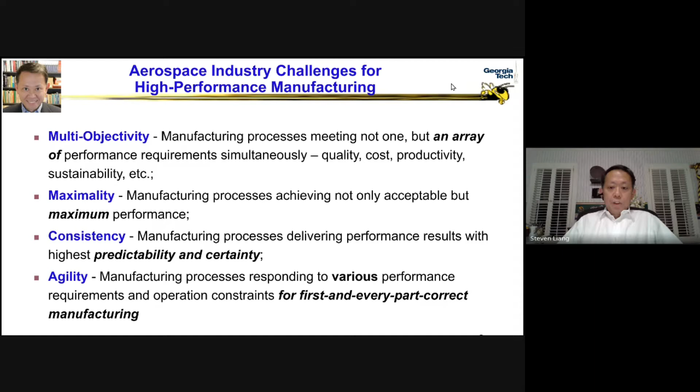We have been involved in quite a bit of effort on process issues related to modeling, improvement, and optimization, as well as the development of new processes. We're also interested in sustainability issues, quality issues, and their relationship to manufacturing and materials.

Let me get into the details of several examples in the field of subtractive manufacturing, the work we have done at Georgia Tech. The most typical example is the use of computer numerical control machine tools for manufacturing, but that technology has been around for several decades. With the use of sensors, controls, and actuators, we'll be able to close the loop.

Let me pop up my pointers. So we close the loop with the use of encoders and tachometers to put the part program requirements in terms of feed, speed, and position under very tight closed loop control.

However, if you tell your customer that your manufacturing feeds, speeds, and depth of cut are very well controlled, nobody will buy that argument, because your customer is mostly not interested in the part program. Instead, they are more interested in the quality, and in the manufacturing cycle time.

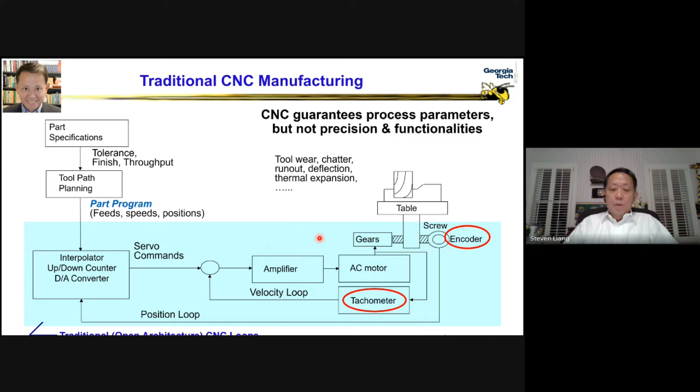So the computer numerical control loop has been found quite inadequate to satisfy the precision and functionality requirements at this current point of technology. So we are moving into smart manufacturing.

Smart manufacturing uses a whole bunch of higher level sensors to measure temperature, vibration, acoustic emission, and machining forces. That monitoring signal is sent to a smart analytics processing module, so that the requirements of the part's function and performance — dimensional accuracy tolerance, surface quality in terms of finish, and productivity in terms of throughput — can be put into a control loop to modify the machine feed, speed, and depth of cut, generating a bigger, more encompassing smart machine tool intelligent platform that surrounds the traditional CNC system.

In this way, the tolerance, finish, and throughput can be very tightly controlled afterwards. This is exactly what the customer would like to have, would like to see.

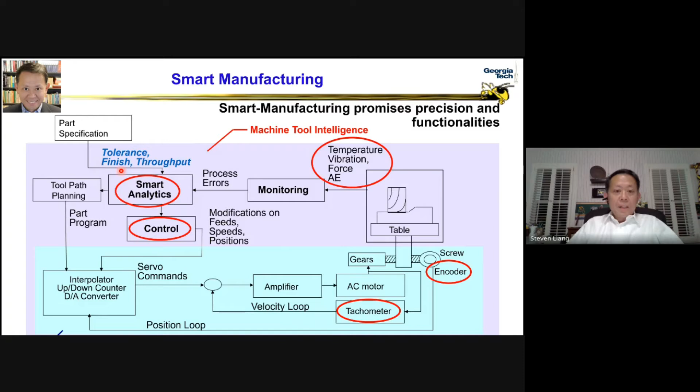And a couple of examples — what I'm going to talk about today will be examples after examples of some of the work we have done with aerospace companies like Pratt & Whitney and Boeing over the years.

In this example of a surface grinding operation, because of the variation of contact area between the grinding wheel and the workpiece surfaces during the feed motion, the grinding force will vary, and as a result the actual depth of cut will change, due to the flexibility of the wheel head and the grinding machine tool structure.

Most of us have this experience: if you grind a part left and right, repeatedly, the two shoulders get ground off pretty fast, and the center portion ends up bulging out. That's pretty much because of the flexibility of the machine tool structure itself.

So what we have done is close the loop by measuring the instantaneous deflection of the workpiece and the grinding force, coupled with actuation and feedback control of the wheel head of the grinding wheel, so that when the wheel reaches the center portion of the workpiece, it is pressed downward a little more to compensate for that loss of depth of grind.

This picture shows the dotted line representing the grinding process without the smart feedback control, and the solid line representing the surface of the ground part with the smart feedback control, under a different set of process parameters. The result is shown to the right.

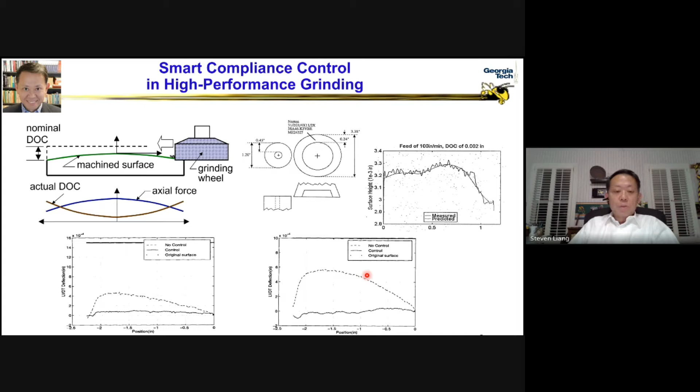Here's another example, not in the surface flat grinding process, but in a cylindrical grinding process, where, in everybody's daily experience, we typically see error coming from transient positioning error as well as steady state final in-feed error.

So what we're trying to do is control the grinding power at an optimal level, which would guarantee the G ratio is maintained at a value that maximizes the material removal rate with respect to the tool wear rate. We found that the power is quite sensitive to the velocity.

Power is not a controllable parameter in the real manufacturing process, but velocity is. We'll look at this example on the right end of this workpiece that has different areas of surface height. Power is what is measured, along with grinding time, and part quality is the objective penalty function, while the process parameter of velocity is set as the controllable variable.

In this case, the velocity will automatically drop to a low level when the wheel grinds into a thicker portion, and pick up again when it grinds to an intermediate portion. So time is not wasted, and dimensional accuracy is very much secure. Out of this smart grinding operation, we're typically looking at at least 30-40% savings in process time.

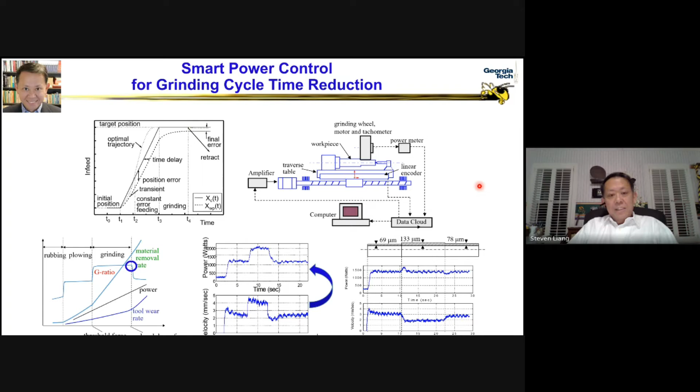Another example is this end milling multi-flute machining operation. Many of you have experienced that the cutter often has a certain amount of eccentricity, what we call runout error, so the cutter will likely wobble in real life. When the cutter wobbles and cuts at the same time, the workpiece surface or dimension will suffer, and you typically see the formation of scallops on the finished product - very undesirable.

And if this is put into the engine of an aerospace vehicle, then the horsepower or thrust force would be compromised.

In this situation, we have been working with a company in industry to put this workpiece on a piezoelectric crystal actuated work table. That work table forces the workpiece to move in and out several cycles per spindle revolution duration. A spindle revolution runs at very high RPM, so does the PZT actuated table. So the table is forced to dance with a wobbling cutter.

So if we were little enough to stand on this workpiece and observe a wobbling cutter, the observation would tell you that the cutter is perfectly true without any eccentricity.

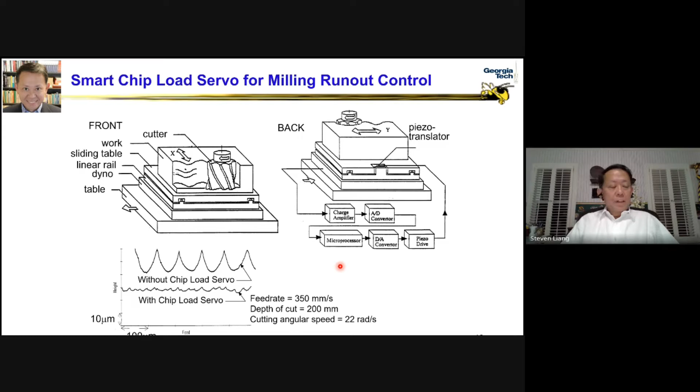That is the result at the bottom of this slide, showing that without this smart chipload servo control, the surface that comes out of multi-flute milling typically has cutter marks. Under the same set of process conditions, the cutter mark can be 70-80% reduced - not completely eliminated, but drastically reduced without sacrificing any processing time.

There's another example of micro-scale manufacturing with a small footprint machine tool production machinery. On the left is a traditional multi-axis CNC system, typically with a linear side dimension of 2 to 3 meters, and we reduce that to about 1/10 of a meter in side dimension. That is a size reduction on the order of 10,000 times.

Not just the size of the machine is reduced - the depth of cut in a traditional subtractive manufacturing setting is about 1 micron, and we reduce that down to perhaps 1 nanometer. That is about 1,000 times reduction in accuracy. So this has a lot of interesting applications.

For example, in a battlefield application scenario, if troops are fighting in a deep mountain or large desert environment, a lot of the battle equipment will unexpectedly lose function because of all sorts of possible problems.

It is very difficult - if we have a tank with a missing gear or a broken shaft, that shaft and gear would have to be sent back to a home maintenance facility hundreds of miles away, and that is physically not possible. So the equipment or vehicle would basically become unusable.

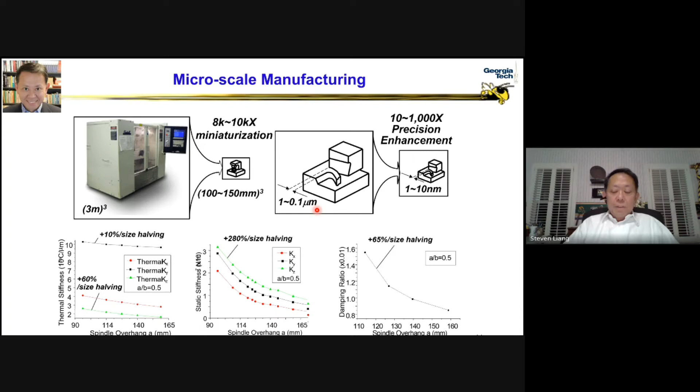That would all of a sudden increase the capability of manufacturing, not only by miniaturization of the production machinery volume, but also by increasing the accuracy and precision of the manufacturing process, because thermal stiffness, static stiffness, and dynamic stiffness all increase significantly with the reduction of machinery physical volume. So we have looked at the application of those.

Some of the work we have done is the knee and column type of vertical machining center, shown in this picture at the center. We actually made this micro-scale machine tool and put a couple of them in Taiwan universities and research centers, with a 300,000 RPM spindle capability - that's more than 10 times faster than the state-of-the-art high-speed spindle. This system has 1 micron runout accuracy, extremely accurate.

It has an Invar structure with high thermal resistance, and uses a two-flute solid carbide cutting tool of only 5 to 10 micron diameter, compared to a human hair - this is only 5% or even 3% of a human hair diameter. Of course, you can imagine how long it would take to go to a barber shop and cut your hair with this cutting tool. That may take you a full day to finish that hair cutting cycle.

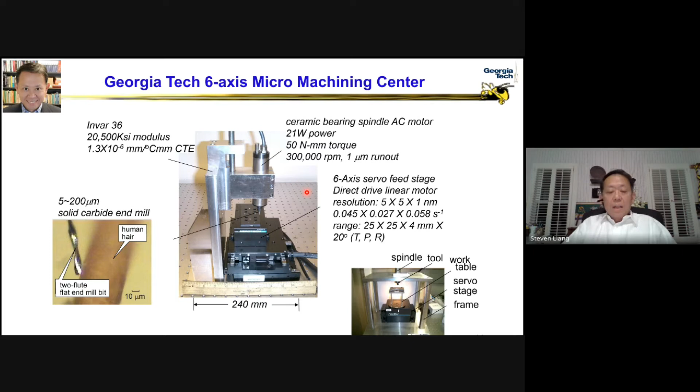We also have done not only the knee and column type, but we also put out some gantry type of milling machines on the market. The cutting tool is so small that most people do not get to see it at all. My assistant sometimes said there's actually no cutting tool, while the cutting tool is indeed in place. If you look at a cutting tool hard enough, it will probably break just by your looking at it.

So the cutting tool is very small, and to find it we need to resort to optical measures using laser locators to find the tool height and the tool position left and right, as well as acoustic emission sensors to identify the contact of the cutting tool with the workpiece. So that is a microscale cutting tool.

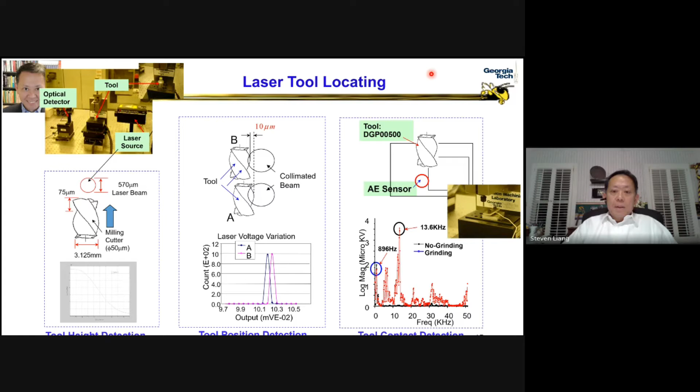There's another example of what we do for precision grinding. Traditionally, in a conventional way, grinding is used to create large, flat, smooth surfaces. If the surface is small, curved, has slots and holes and small re-entrant details, the surface becomes very difficult to grind successfully.

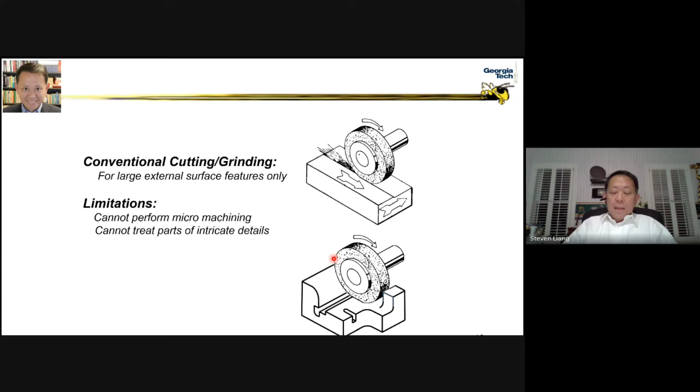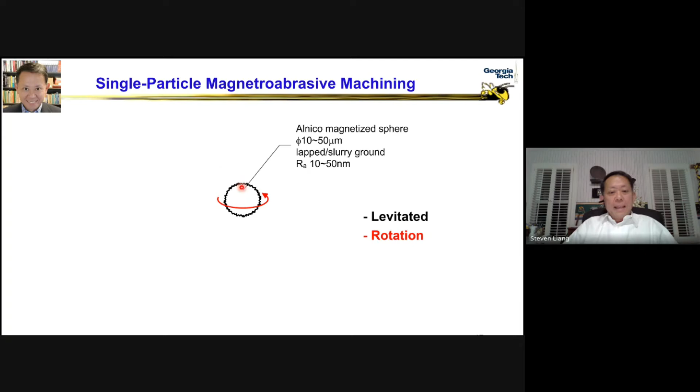What we have done is use what is called single particle magnetoabrasive machining - to take one grinding particle out of a grinding wheel and put it under a very high level electromagnetic field for some time. This particle, taken from the grinding wheel, is magnetized - an AlNiCo particle - and has a north pole and south pole. Since it's polarized, we can put it in a magnetic field so that it will rotate with the field.

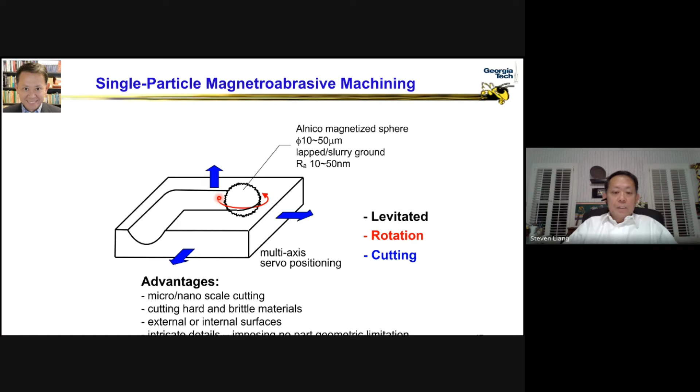If we put this rotating particle in contact with the workpiece, while the workpiece is making multi-axis CNC controlled motions at the same time, cutting can begin not only from the outside surface but also into the inside surface to create inner details as well. This allows us to do micro-scale cutting that facilitates what is called ductile mode brittle material machining - we'll be able to cut ceramic and glass relatively easily without breaking the workpiece. The ability to cut internal details and minor micro-scale features is quite important, and this is how we did it.

The magnetized particle is first suspended in free air, with a horizontal magnetic field of constant voltage applied. There are two other AC-connected electrical loops that alternate in time with a 90-degree phase difference, so the resulting magnetic field points in a direction that is changing with time. This little magnetized particle ends up chasing after the rotating magnetic field tirelessly, rotating at a couple thousand RPM, and begins to be able to grind.

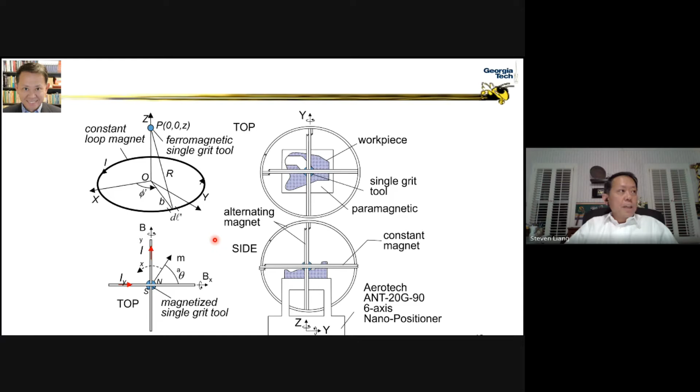So in the area of subtractive manufacturing, we have done work to look at different process behavior associated with the workpiece, particularly how high the temperature will go. This is important because the workpiece temperature will affect dimensional accuracy, warping, and distortion.

How much force is being taken will determine the required payload of your manufacturing equipment, and how much the workpiece is likely to chip. That's super essential for applications involving very hard materials, for example ceramic or high carbon steel, which can easily crack at the tip of the tool and compromise part quality.

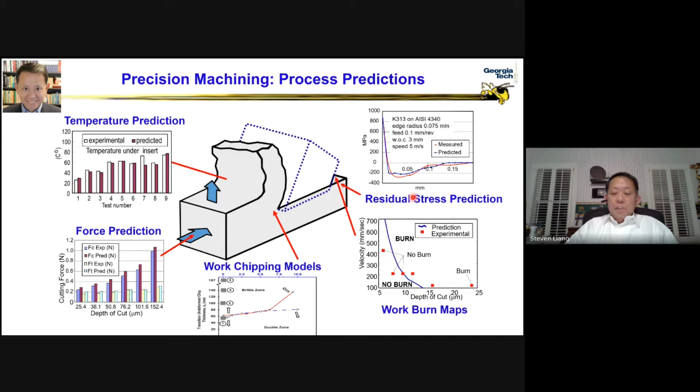We also look at the prediction of residual stress from machining—we'll talk about that in a minute if I still have time. In precision machining, our work also looks at the behavior of the cutting tool in terms of wear pattern, as well as the aerosol generated by the cutting tool.

This is everyone's not-so-pleasant experience: if you go into a machine shop with lots of machine tools running, you typically unavoidably smell cutting fluid in the air. That cutting fluid smell is relatively bad for the operator's lung, respiratory system, or even skin.

So we have worked with a lot of industry companies to look at controlling process parameters in order to curb the generation of cutting fluid aerosol, generated from several mechanisms: cutting fluid splash, spin-off, evaporation, perturbation in the air, as well as condensation. The cutting fluid turned out to be quite effective already without using the wet mechanism.

So what we have developed here is near dry machining, NDM, which sprays a very small amount of cutting fluid in the cutting zone. The effect to protect the cutting tool would be just as good. This is the use of minimum quantity lubrication to maximize the performance of machining.

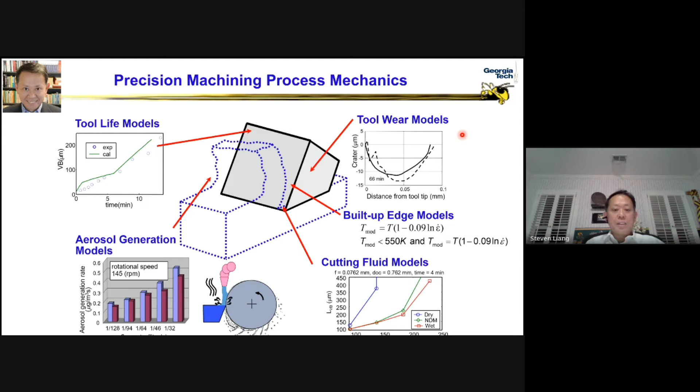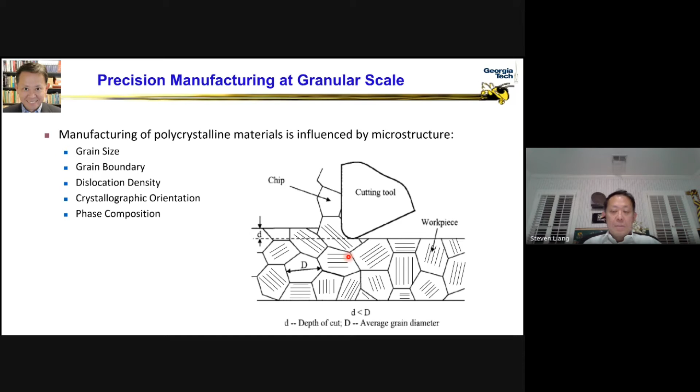So we also look at materials relevant to manufacturing, to look at the microstructure attributes of the workpiece and how that is changed by the process of machining. Here is an example that shows when the shaping or scraping operation is implemented on the workpiece, we're able to analyze the variation of grain size.

On the left picture, the grain size is relatively large compared to the grain size inside the chip. As a result, the hardness or rigidity of the workpiece is relatively low compared to that of the cut portion, as well as the chip.

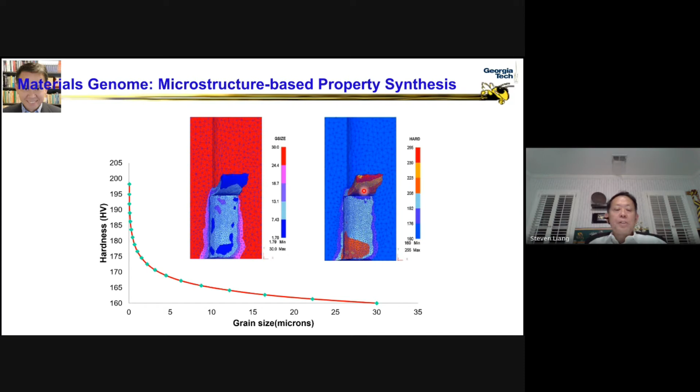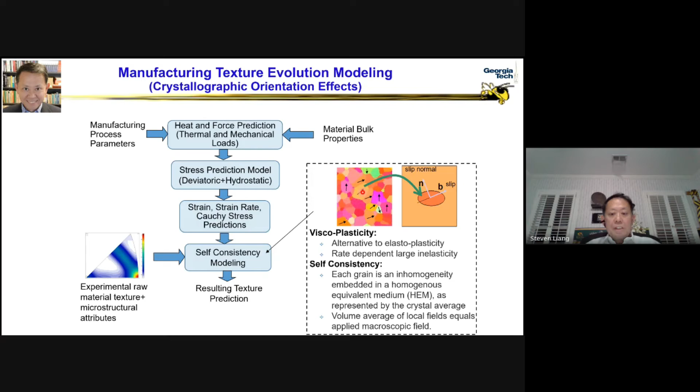With analysis at the microscopic microstructure level—we call it the viscoplastic self-consistency analysis—we're able to predict exactly what is going to happen to the workpiece when machining operation takes place.

For example, on the left-hand side we have a set of pole figures taken on the uncut raw material. Then when the material is cut into the final product, its microstructure crystallographic orientation is shown on the right-hand side, modeled by our analytical predictions in comparison to experimental measurements on the left.

In terms of the inverse pole figure in the middle row, as well as the orientation distribution function—this basically represents the features of the texture before and after cutting.

We can see, for example, the inverse pole figure has a maximum intensity before cut of 2.28, and it dropped to 1.95. This was very well predicted with our model in comparison to the actual machined parts.

Average grain size drops dramatically from machining, as predicted and very well compared to experimental measurement. The hardness of the part increased significantly by machining, very well predicted and very well compared to experimental data.

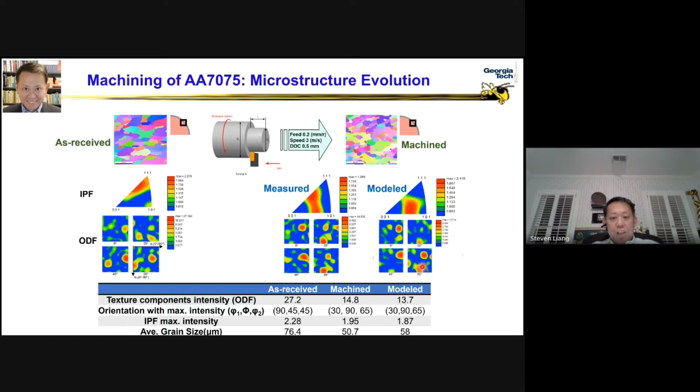So this goes against the fundamental understanding that machining or subtractive manufacturing is typically done to change the shape but not the property of the workpiece. The property is usually changed by heat treatment or other methods, but that is not the case here in our study, and this changes people's mindset and creates new imaginations.

Residual stress is also very important when a part is cut, because residual stress is so influential to part distortion, part deformation, as well as fatigue endurance in repeated loading situations, and it also affects the part's resistance to corrosion.

So in our analysis, the residual stress is very difficult to predict, right? Analytically, people do a lot of repeated trial and error experiment work to understand how much residual stress will be ideal. I've talked to an aerospace manufacturer in the U.S., and they sponsor a lot of our work.

They say that their turbine blade is about 15 to 20 times more expensive than a third-party copycat turbine blade product. But their turbine blade can last a good 4 to 5 years, while the copycat turbine blade will last 2-3 months and break. The geometry of the turbine blade, the material, Ti-6-4, are all exactly the same.

The difference in the performance is in the residual stress, because the copycat duplicates my sponsor's geometry and materials, but they cannot duplicate my sponsor's residual stress, because residual stress is intimately related to the process parameters and process conditions that you cannot duplicate as a competitor.

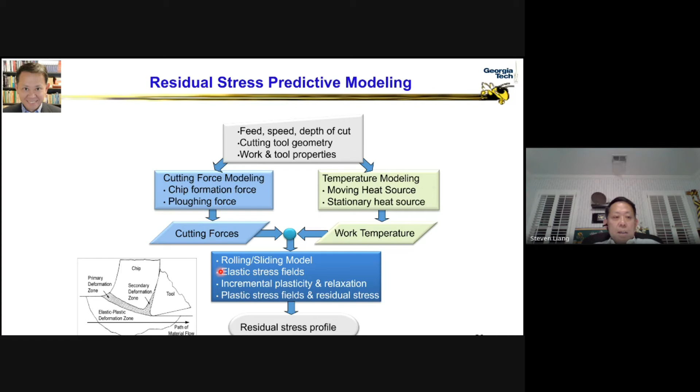So you need to understand how residual stress is created, and we have done a lot of work for the American aerospace industry to look at the mechanical loading, cutting force, as well as the thermal loading in terms of temperature effect, and come up with the kinematic hardening and incremental plasticity analysis to predict the residual stress quite nicely.

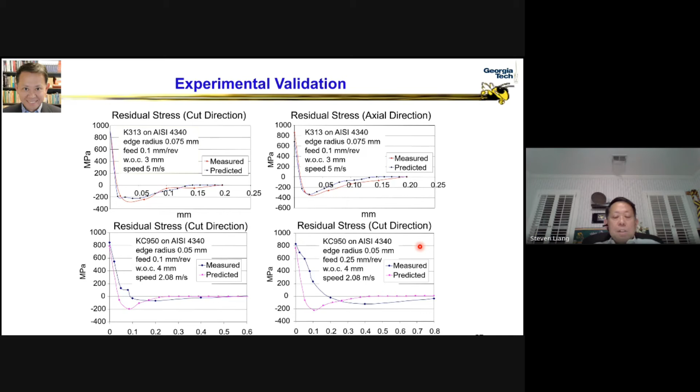And what is also quite important is the reverse engineering process. If the user or the technology user is interested in knowing what type of combination process parameter, what is the choice of depth of cut and tool geometry that will guarantee the residual stress, then the analysis is totally reversed.

In our case, because our analytical model is completely analytical, physics-based, and closed form, we are able to reverse our analysis to use residual stress specifications, for example compressive residual stress at the surface to a certain depth, as the input.

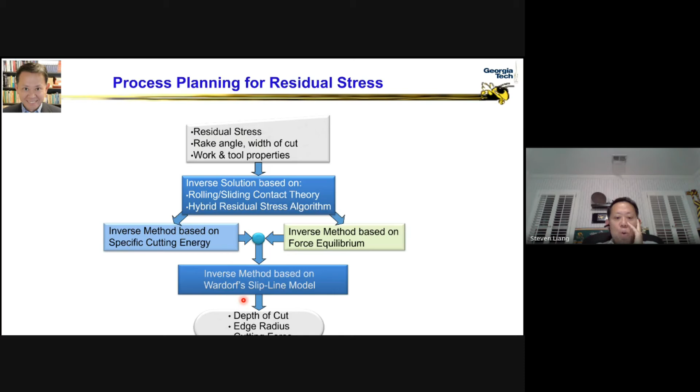And then the calculation will come out to advise what would be the best choice of depth of cut in the cutting tool geometry and so on and so forth.

And this is a validation of what we do. Our sponsor actually implemented the dark blue color part residual stress distribution, but they did not tell us what was the process parameter that was used to generate that.

They gave us this blue dark line as given input, ran our program that will offer the combination of process parameter, and used that set of process parameters to do physical cutting one more time to generate what is called residual stress in the reverse process, shown as the red line. They come out to be quite similar to one another.

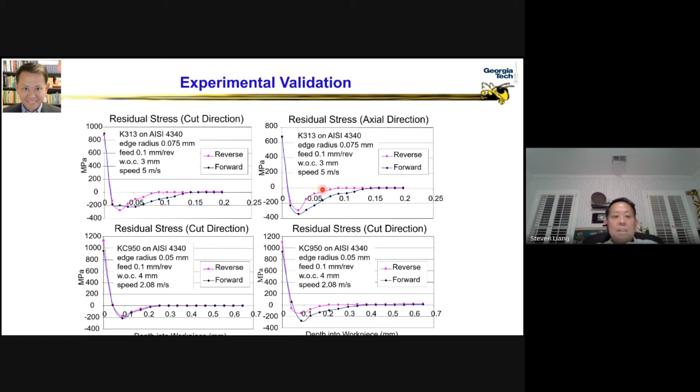Okay, so I don't have much time left, maybe a short 10-15 minutes to talk about additive manufacturing and what we have done at Georgia Tech.

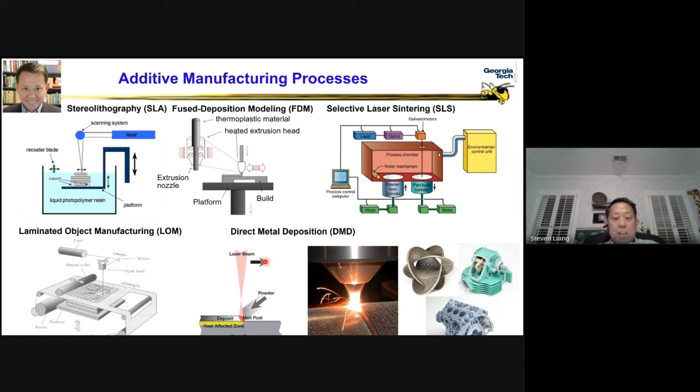Of course, additive manufacturing is done on many different choices of material, like fluid material, paste material, powder, solid material, or film or paper or sheet material. And we have done quite a bit of work at Georgia Tech based upon the laser fusion of powder bed as well as powder feed configuration to generate different geometries.

And this is an area, the additive manufacturing for metal. Now, we don't do much on the polymer and ceramic and composite. We do exclusively study for metal.

As this is just the metal, it has been growing at a pace of 15% every year globally, and in the APAC region we see 18% growth, and this is tremendous. It's hard to see any industry that has that much growth. If you put your money in the bank for 1 year, you will be fortunate enough to get 1% back, and this growth in additive manufacturing is much higher than that.

In aerospace application, there's a full array of different applications of parts, components, and designs that contribute to the growth of additive manufacturing. Additive manufacturing is also quite important for the cost aspect of it.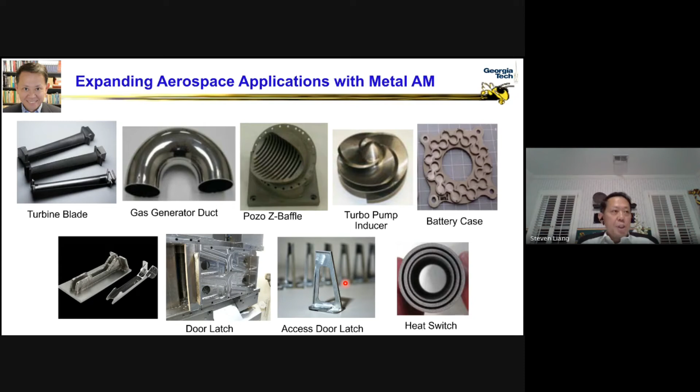In the old days, these critical parts were probably mostly machined to maintain part geometry accuracy, and wasted a lot of material in the form of chips. But nowadays, aerospace is talking about a buy-to-fly ratio, and the waste of material is definitely a big thing to be avoided.

And why is this additive manufacturing so important?

Let me take it back. What we're doing is predictive modeling for additive manufacturing. Why is predictive modeling or the prediction capability so important for additive manufacturing?

It's because conventional manufacturing, for example forging, casting, rolling, these processes typically have a much larger batch, and many parts are created. So it would be justifiable to spend 3 hours developing the correct die geometry and the correct combination of process parameters, if you have to do mass production that would take 50 hours, if not 500 hours.

But that's not the case with additive manufacturing. You are producing 1 or 2 parts, very low quantity of production. If the total production only takes 5 hours, how does it make sense to spend 3 hours doing trial and error and repeated experiments just to come up with the best process parameter? So in additive manufacturing, the only way you can survive in this business is to be able to do accurate prediction, so as to get the first part right every time, without trial and error and exhaustive experimental testing.

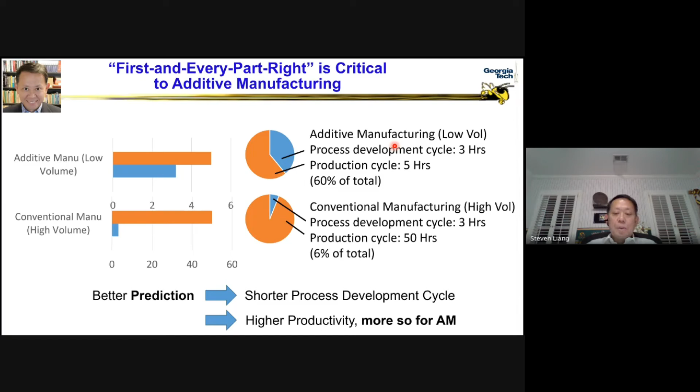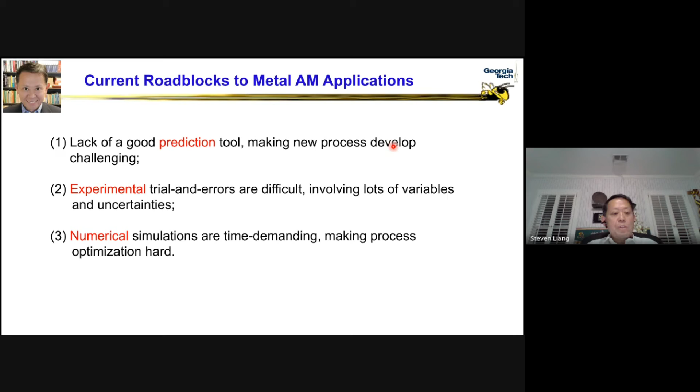So far, the bottleneck in the industry is that additive manufacturing lacks prediction tools. Prediction tools can be developed through a large amount of offline, upfront experimentation, but that takes a tremendous amount of time. People also do numerical simulation, finite element analysis, but that takes a tremendous amount of time as well. For a single scan track of laser fusion, numerical simulation with ANSYS would easily take 3, 4, 5 hours.

What we're trying to do is computational mechanics of material calculation for prediction of additive manufacturing performance and quality, so as to predict very rapidly, systematically, and accurately.

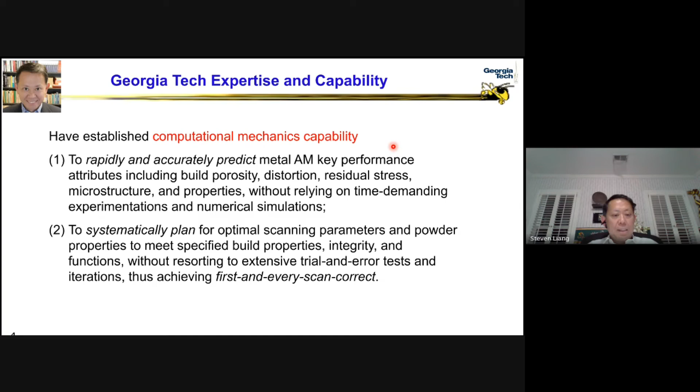In this configuration, for example the laser powder bed fusion process, if we're given the material property, the scan strategy, and the combination of process parameters such as layer thickness, build geometry, and so on, we'll be able to predict the thermal history in the process cycle, P. From there we'll predict the microstructure attribute in the structure cycle, S, and subsequently predict the mechanical behavior in the performance cycle, P. This is the PSP, the prediction cycle.

So we're able to predict the in situ, real-time temperature distributions during the laser fusion process. Accordingly, we're able to predict the thermal stress and thermal strain profiles, and come up with the predicted microstructure in the context of grain size, crystallographic orientation, and phase field. We're also able to predict the residual stress as a result.

From the residual stress, we're able to predict part distortions and the formation of porosities and vacancies inside the printed part. We're able to predict part quality because we already have the predicted microstructure information. We're able to predict the quality or property in terms of strength, hardness, and elastic and plastic modulus as well.

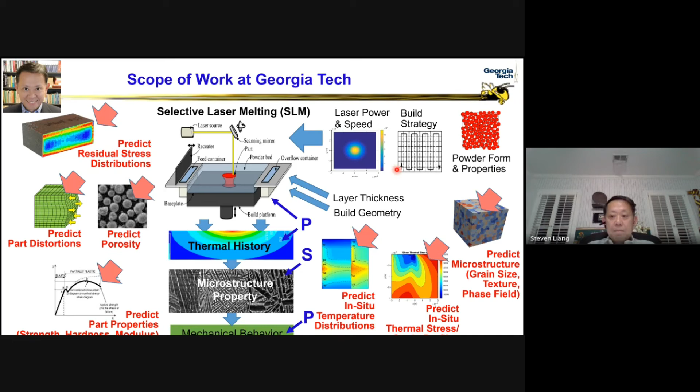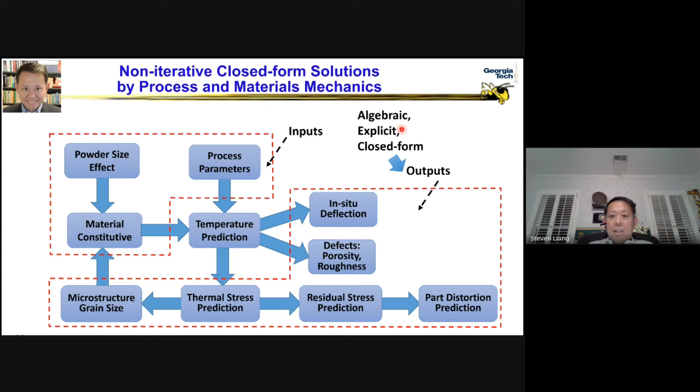This is all based on the thermodynamic and heat transfer analysis of the additive manufacturing configuration. So we build our prediction based on the given inputs of process parameters and powder material configurations, and calculate these attributes of interest in the form of algebraic, physics-based, explicit, and closed-form solutions to describe the output.

A lot of people will ask, why do we not do finite element analysis? We at Georgia Tech are probably the only group internationally that does not do finite element simulation. We do physics-based computational mechanics modeling, and we intentionally avoid finite element because our model is much faster, faster than a couple hundred times, and much more accurate.

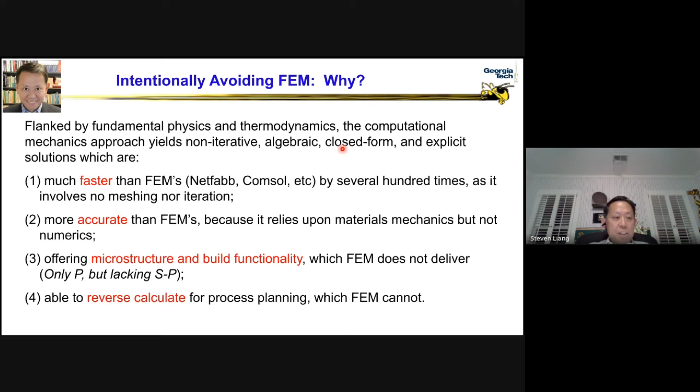And we are able to predict microstructure, which finite element doesn't do. We're able to reverse our calculation and computation. Finite element cannot reverse. I do not know if you can do it, but I certainly cannot reverse a finite element calculation. But with our physics-based analytical closed-form solution, we can easily reverse our calculation.

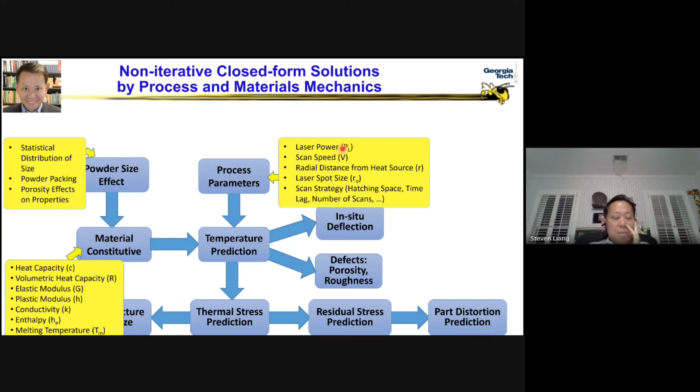Using these material, process, and laser configurations as input, we look at a Lagrangian distribution of energy conservation to come up with what is called a moving heat source model, that describes the temperature distribution, even considering the part boundary loss and the geometry effects of the build part.

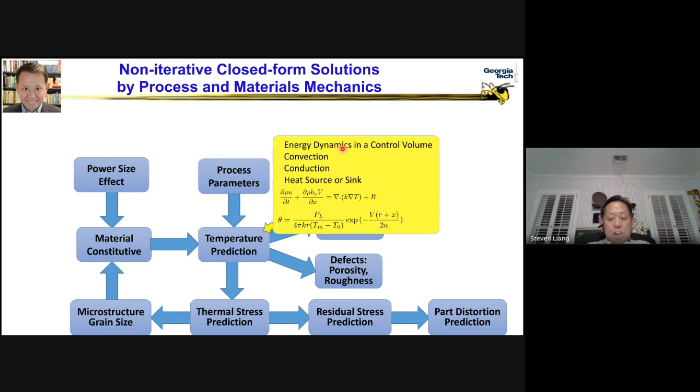From this thermal stress analysis, we try to describe the effect of repeated heating and cooling during laser sintering, the laser fusion process, with the use of a Green's function of stress to characterize the in situ elastoplastic thermal stress and thermal strain, including surface tension, body forces, and hydrostatic stress, and be able to use kinematic hardening and incremental plasticity to calculate in closed form, without any time spent, the residual stress left in the printed part back at room temperature, and to calculate the microstructure grain size and porosity.

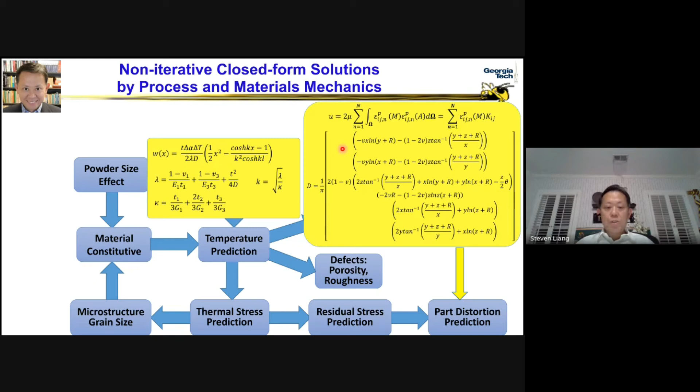In the interest of time, I'm going to skip the analytical details on part distortion and look at the results of our temperature profile calculation. This result is absolutely not coming from finite element. This is calculated from our MATLAB code that can be done completely, even with a pocket calculator, in closed form.

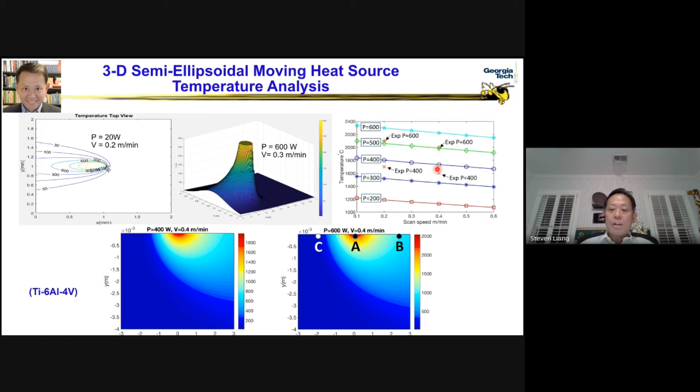This is what we call a moving heat source solution that can describe the temperature profile pretty successfully. It's very difficult to measure temperature in real time during the laser fusion process - for Ti-6-4 it goes to more than 2,000 degrees. But we managed to pull out some teeth and measure several points of temperature in comparison to our analytical model.

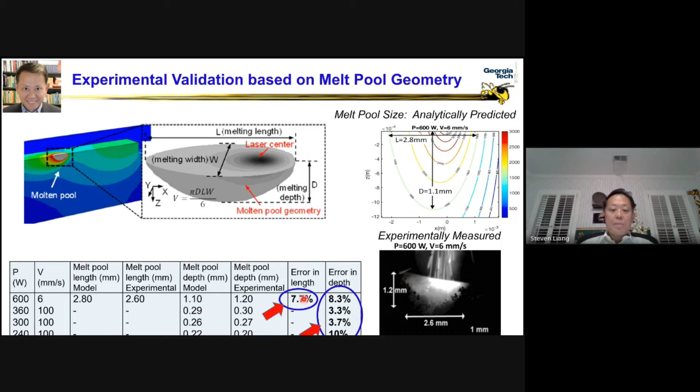We also looked at an easier way of measuring the heat affected zone, the melt pool geometry, and compared that. Melt pool geometry is easier to measure and compare to our analytical prediction, showing quite close agreement. This is how we incorporate the effect of boundaries.

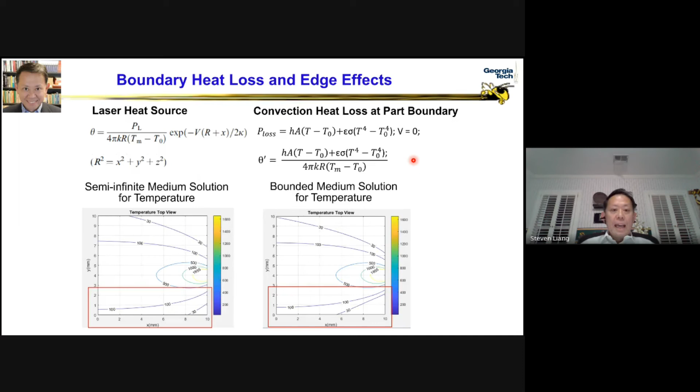We look at the effect of scan strategy on material property. A larger hatching space, as well as a longer time delay within the different scan tracks, will then reduce the temperature and reduce the specific heat and thermal conductivity of the material.

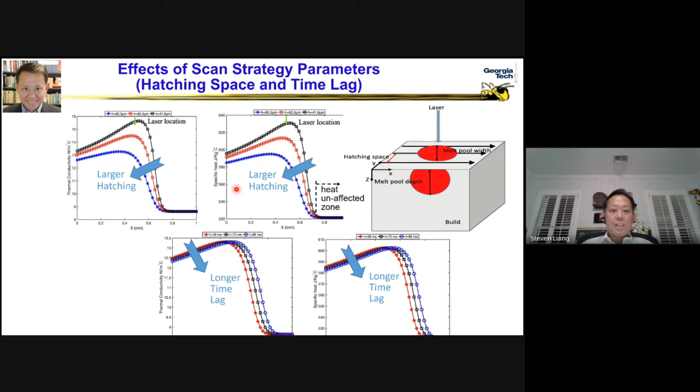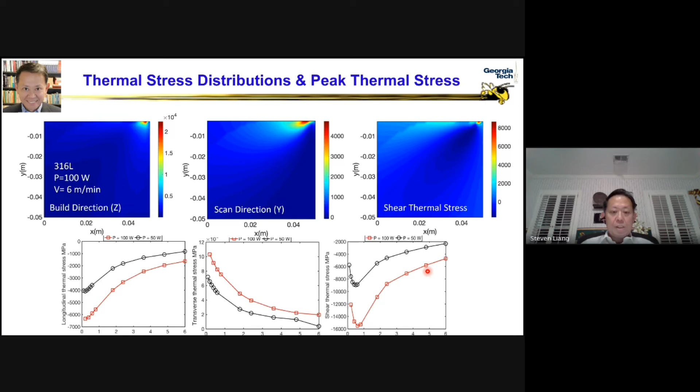And this is a picture of a residual stress. Do I have another five minutes to wrap this up? Yeah, I think we have maybe 10 more minutes for your talk plus questions. So five, okay, five. Okay, thank you.

This is a picture of our calculated residual stress in comparison to experimental validation, shown in red circles. It shows that the surface layer, where the melt pool depth is - this is the very last surface layer that is scanned over - always shows a tensile stress. This is very undesirable for aerospace applications because it suffers from the initiation of cracks under repeated loading.

This is because the last layer is cooled and solidified very last, and so it suffers from its immediate lower layer holding it back from contraction. Therefore, it's put into tensile stress.

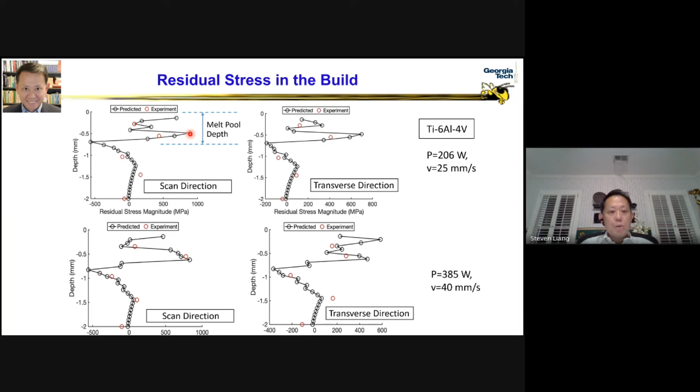This also agrees very well with people's experience that in a repeated loading situation, the crack initiation location is typically not exactly at the top surface, but at the 300 to 500 micron subsurface. From this prediction, we come to realize that the 300 to 500 micron subsurface location is where the largest tensile stress is typically predicted.

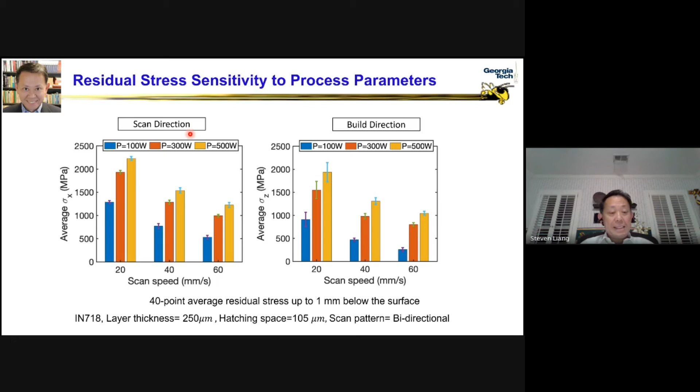This is how the stress is sensitive to the process parameters of scan speed and laser power. I'm going to skip the effect of process parameters like hatching space and all that on the resulting residual stress.

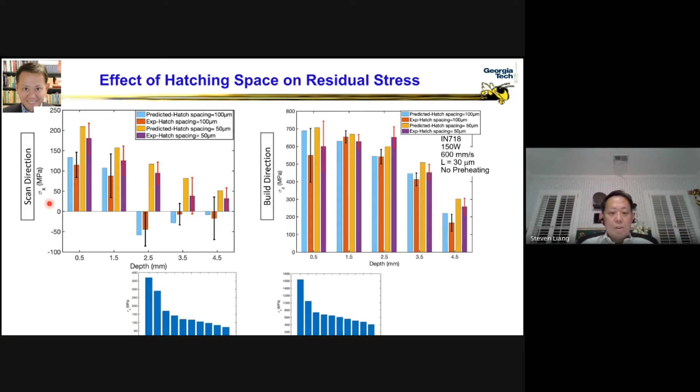It is also quite interesting to see that preheating - a lot of people do preheating, preheating the substrate before you start printing - that preheating, if done at less than 200 degrees Celsius, would be quite advantageous because of the reduction of thermal gradient in the printed part.

But if... I guess I'm just talking too fast, so my throat is a little bit itchy, but nothing to worry about, I just tested negative. In the old days I would like to stay with people that are positive, I like to be with positive people, but not anymore.

Now I try to stay with only negative people. Okay, anyways.

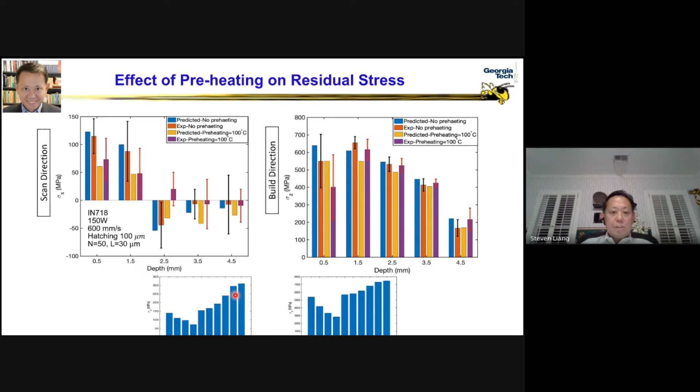So if the preheating temperature goes above 200 degrees, we see that the flow stress actually reduces and the residual stress will increase as a result. That is a very interesting result that can be predicted. The grain size is predicted, along with the formation of defects.

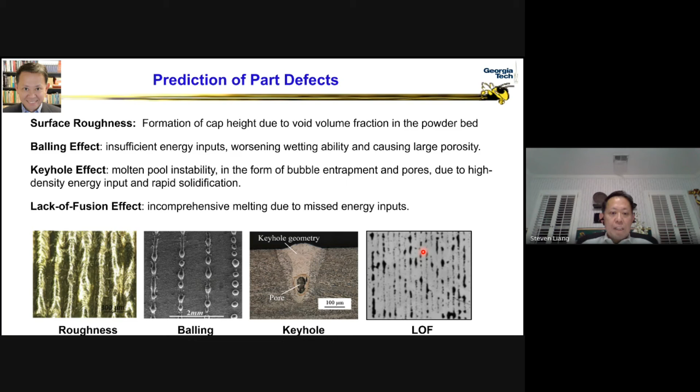This is one of the biggest topics in the area of additive manufacturing. The resulting surface roughness is because of the cap height, the resulting balling defects are because of insufficient energy inputs and reduced wetting ability of the material. Very undesirable. Keyhole defects form if the laser energy is too high or the scan speed is too low, resulting in the formation of pores and bubbles inside the part. Very undesirable. And lack of fusion occurs due to the incomplete overlap of the heat affected zone.

This is how the surface finish is created by the cap height. We have quite a bit of experimental data showing that it predicts quite well with our analytical prediction of surface finish under different process parameters.

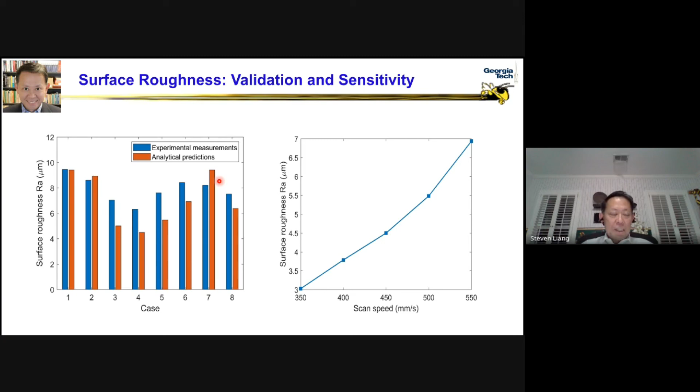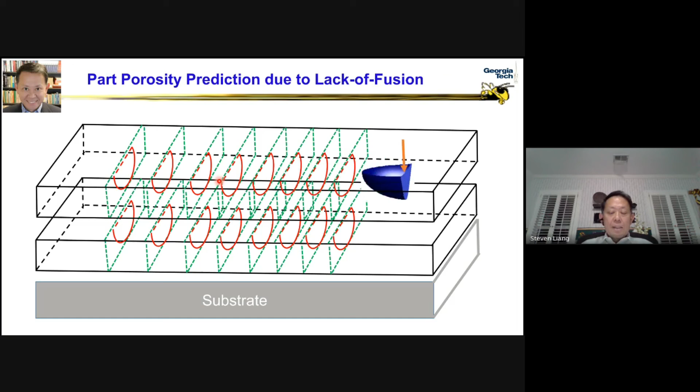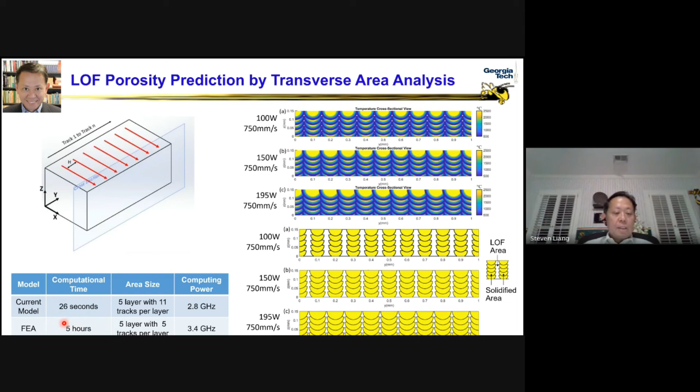So we're able to calculate the lack of fusion. This may take a couple of seconds to show our capability of predicting the lack of fusion porosity. With our model, a closed form solution takes less than 1 minute to complete, but with the finite element ANSYS calculation, that will take a good 5 hours of simulation.

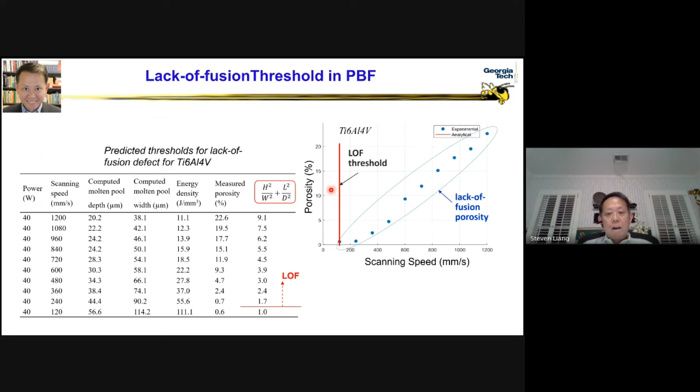We're also able to calculate, because the lack of fusion is a geometrical thing, a threshold value above or below which the lack of fusion will not happen.

The keyhole, as I said, is a result of high energy deposition into the material, generating instability of the fluid that releases air bubbles. These air bubbles, unfortunately, if they do not have enough time to escape to the free surface, get caught and trapped by the moving interface between the solid and liquid, and become permanently embedded into the solid material, forming pores.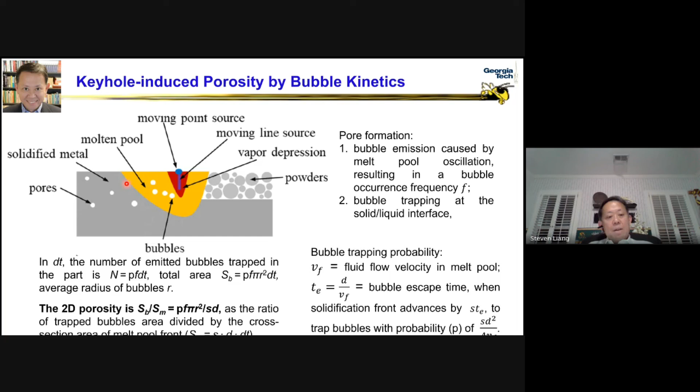From the thermal history and temperature profile, we're able to calculate the characteristic velocity of those bubbles and the probability frequency of the bubbles getting trapped, and calculate the two-dimensional, three-dimensional porosity as a ratio of the bubble cross-sectional area to the moving interface cross-sectional area. This is a comparison here on the lower right of our prediction compared to experimental measurements.

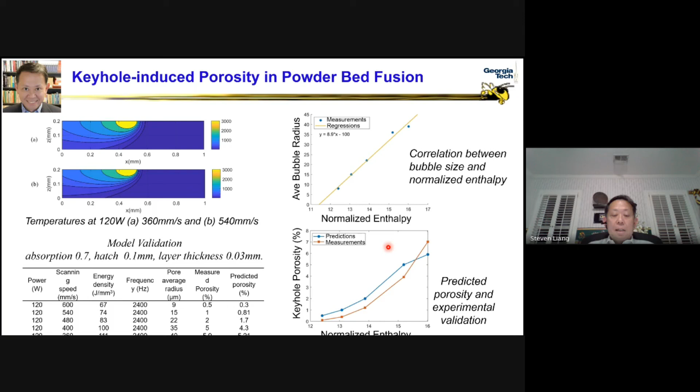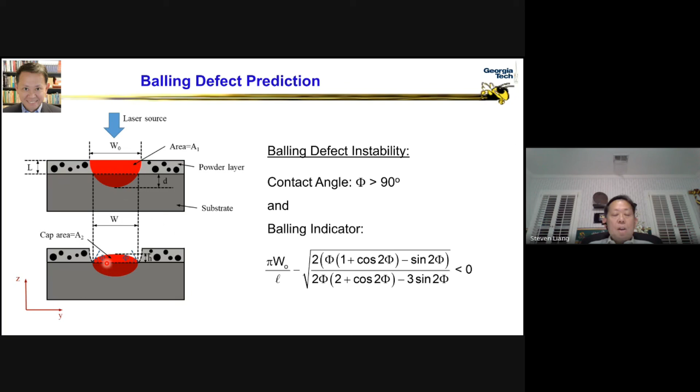This is the balling effect. Balling takes place when the cap height has what we call the contact angle greater than 90 degrees. The red portion of the cap height will then fall to the sideways on the left and right to generate balling. If you look at where balling takes place according to our threshold, balling will occur when the balling indicator becomes negative and the contact angle is greater than 90 degrees. Then you can see balling take place following the prediction of that threshold, in different configurations with different materials as well.

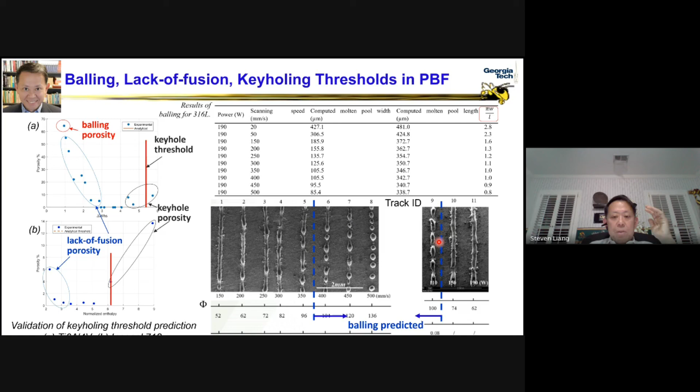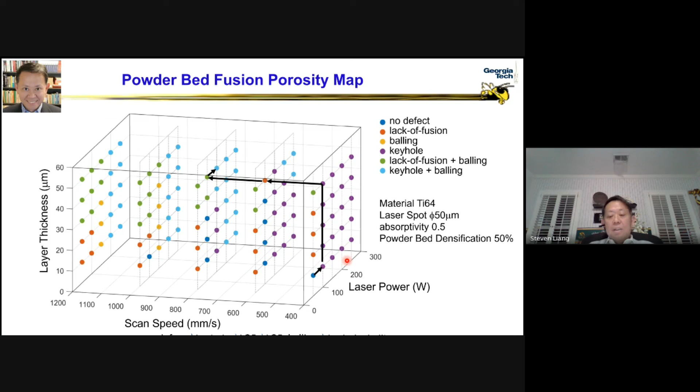From these analyses, we're able to generate a so-called porosity map. This is an example of a combination of process parameters: scan speed, laser power, and layer thickness. If we start from the lower right corner, there's no defect. Increasing the laser power, we get into the keyhole region. Increasing the layer thickness and scan speed, we get a lot of lack of fusion. With further higher speed scanning, we get into the defect of balling. With higher laser power, we get keyhole to show up again.

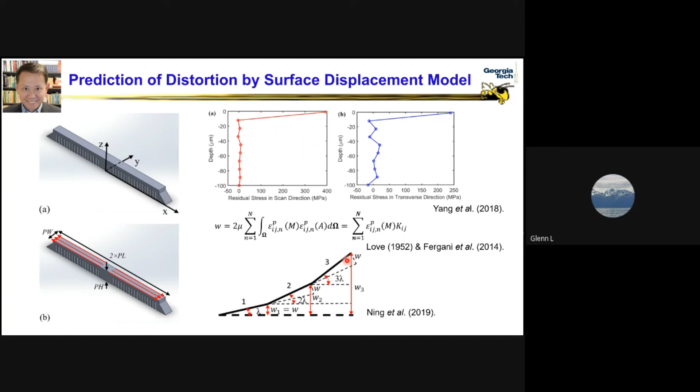So I guess, Glenn, this would be a reasonable time for me to stop. Yeah, so one last slide.

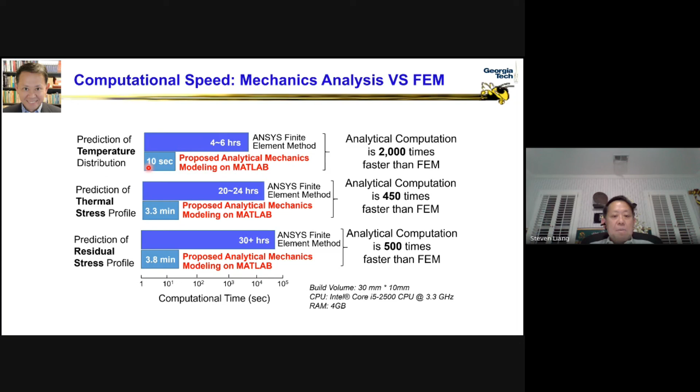The prediction of temperature in our calculation - if you use the ANSYS finite element software, it would take about 4 to 6 hours to calculate the temperature. But in our prediction, it takes about 10 seconds. Thermal stress works pretty much the same way.

So with that, let me say thank you very much for your attention. If I may entertain any questions of yours. Yes, thanks, and we do have maybe just a couple minutes for 2 or 3 questions. Sure, there's one in the chat, which I will read.

It says: great work, did you use the control volume approach to generate the additive manufacturing numerical model? Yes, that is exactly it. The control volume, the Lagrangian description of energy conservation - that's exactly what we did.

Great, okay, and I see there's a hand raised, so if you want to unmute yourself, that'd be great. Okay, so please, can you hear me okay, Professor? Very clearly, very clearly. So good morning, Professor. So I have several questions.

First one: as you say, the single particle magnetic abrasive machine uses a magnetic field to control the magnetization particle to cut material. So my question is, because this kind of technology requires a high accuracy magnetic field, if the environment has other magnetic fields, like from a laptop or other electronic equipment, will that impact the accuracy? That's the first question.

Yeah, may I answer that one by one? Because at my age, I may not remember your question when you get to the third one.